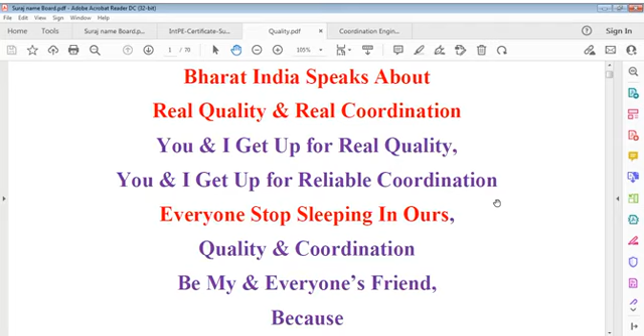And if you can lead yourself successfully, you have complete potential, you have required potential to lead others. Everybody is a leader, one has to understand that, but it depends on your control on yourself. Quality is a kind of control on organization of quality, control on quality processing, control of how much you can achieve, or control it to requirement, and also you can control it to its improvement, meaning you can add value onto requirement. That value can be in monetary form, that value can be in processing form, that value can be in degree of enrichment form, and whatever you can call that, that is quality.

Quality has many meanings. It's not only quality testing, it's life of product, life cost of product, and how long that product can be used - it is in your hands. If you produce quality and good material is used, and whatever was expected helps that person who uses your product, he should feel satisfied. That person can feel satisfied only if your product fulfills defined requirements, and that definition lies with you.

Every product is defined, every product is specified, and we have to be very clear on that. My product is defined, I understand very well what I have to do, and I'm doing this - that point is really important. We have to be clear about that requirement, what that requirement is - I have to do this.

Unnecessary explanation has no meaning, but people are not able to do something - I have seen well what level of quality these days is. There's no way people cannot come out of sleep easily, but we have to bring them from sleeping status to waking status to thinking status, and that can be brought together by certain positions, certain domains, something not mandated by education - that is quality and coordination, which both are important.

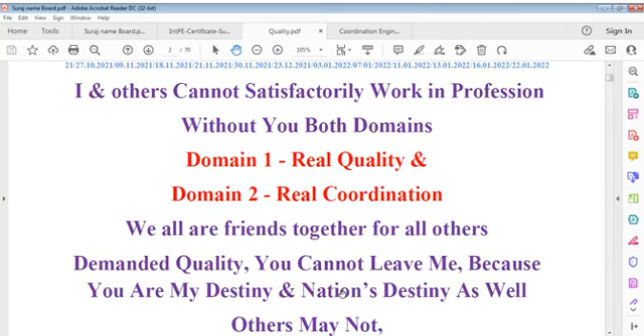How does it move itself? And when it moves with others, how does it move? How do others move? How do these interact together? That is a very important point.

That's why we said demanded quality must be there, demanded quality must be realized, and I can say I can't work without that. I also expect quality should not leave me, because it is my conscious, it is my objective, it is my destiny. And when it is my destiny, for sure, it is my nation's destiny. And if it is nation's destiny, this means it is world destiny, or ultimately, this is destiny of our part of the world.

Engineering means you have to do it. Engineering and quality are no different - without quality, engineering cannot be called done. Engineering means you have to produce quality, or if your product or work is without quality, or gives different quality than it should, then we can say you have violated the quality system. You are not given what is required - we can't accept your product, and whoever is competent to accept that product may or may not accept it.

It depends. But don't forget, engineers are taught - maybe not in subject form but in work form, post degree or post diploma. You have to work, and if you don't understand the meaning of quality in education, you may not be able to apply that by just understanding. I did not study this, I don't understand meaning of quality - but we cannot say in this age quality is not understood.

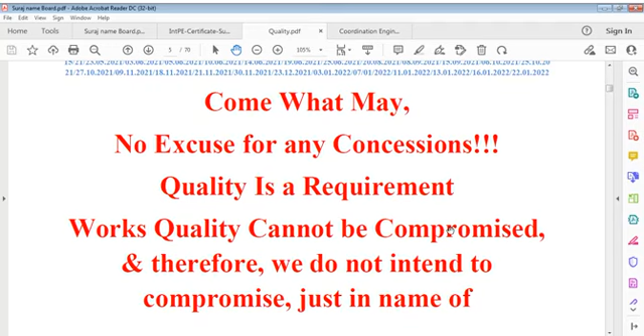Quality is a requirement, work's quality cannot be compromised. There is no question of why I should compromise. I don't compromise anything.

Therefore we do not intend to compromise just in the name of a fragile existing quality system. I don't believe in a system that is fragile, which doesn't guarantee any quality. What ISO says is different, but I believe in a system where the product comes with quality.

Otherwise there exists no meaning in doing a system, following a system, making a system, planning a system. There doesn't exist any meaning if we can't achieve it. If we can't achieve it, then what is the system built for, what is it implemented for? Now there's no meaning at all.

All systems are useless if this can't be achieved, and we can't live on a piece of paper regarding your certificate, saying I'm ISO 9001 compliant or I have the certificate. That certificate has no meaning if your work doesn't evidence it, if it doesn't prove that you have that capacity, and that capacity building is very important.

Engineering, education, and practical work, and then the job, all deliver chances of learning and learning and learning, and that's why we call it a part of development.

All work we do and all jobs we do, whatever jobs we do with responsibility, that can be called a contribution to the world of engineering, or doing something in engineering. It should improve your knowledge, and it should improve the knowledge of others, and whatever work we do, whatever item we carry out, it should be functional.

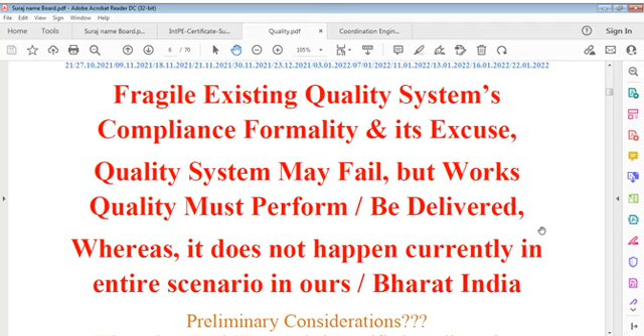This delivery is my job, this is the delivery job of an engineer, this is the delivery job of a unit, manufacturing unit, customer, whatever it is, we have to see that. So we have to find everywhere, we have to see which way obstacles come in. That's our job to know.

Obstacles - is this clear? We can understand what obstacles are available so that we cannot do a quality job. If you understand this, every job becomes very clear.

Engineering is that you have to study yourself, read yourself, you have to understand what it is. Everybody cannot be taught to you. As an engineer, you have to learn yourself, because you're an engineer, you have complete capacity for learning mathematical work, physical work, or augmentative work, quality enrichment work, whatever you do according to your caliber.

All stages come up, and you must fit somewhere, or if you fit everywhere, you're the best person, I can say. It depends on what work you have to do, and that's a very important point.

I should also say, there's nothing we can't do. If we have to do it, we do it.

That's why red lines, whatever come, there should be no red lines at all, because we are all good people. Why should there be red lines? No question of red lines, but still there are red lines because we are careless.

I can't blame that red lines come. No, red lines come, of course. Red lines mean they're not automatic. It's because of our negligence.

If we do what we say, if we comply with what we say, if we move on the same track which we decide ourselves, then why would we say we could not comply with it? There should be no question at all. But we are all human beings, and sometimes not one person works, many persons work.

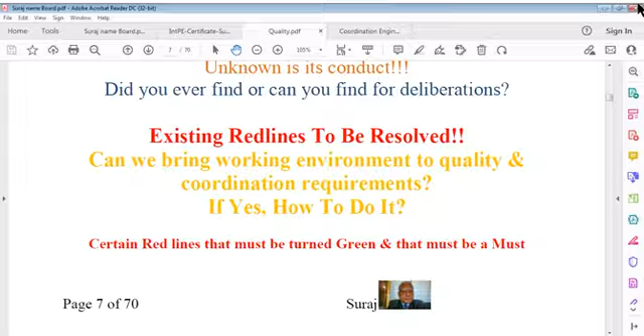And that's where red lines are there. What red lines are there? Why are these red lines there? We have to understand ourselves, nobody will teach us. If we are able to understand why these red lines are red, why can't we make it green, or make something else, so that work moves on. Red lines can be many, but once you understand what a red line is, then you can check it, and that's a very important point.

So I raised many questions last time also, that we have to do this in engineer's detailed deliberations, which I always say is very important. Detailed deliberation can never end. Every day you can think and do this, because deliberations are detailed studies. Liberation, it is deliberation. You can say we just separate D from liberation, meaning you have got complete freedom.

If you understand what to do, what way you have to do it, if your deliberation can happen, if you know, 'I trust this work, I trust this proposal, I trust this direction in relation to my capability, my caliber,' I understand this, and when I understand it means I can do it. That's called liberation, meaning you have liberated yourself from some misconception. That liberation shall happen automatically.

You are now calculative, you have calculated, you have checked. Now it can be done if I have this information, I have this system, or I have a method. I apply this, and I have done it and tested it. That comes to compliance, and that's very important.

We have to deliberate our roles, we have to deliberate our responsibilities, we have to deliberate our obligations, and we have to deliberate whether we have done it well, or whether there still lies some deficiency, some requirement that we could not comply with.

Information must be brought to those persons who require it. It must be provided at the right time for the right requirement. If you miss it, that person cannot coordinate, the person who receives that information to insert somewhere, but doesn't insert it. That means it doesn't come to study, it comes to understanding, and you say, 'okay, this is missing something.' Missing only means you did not take care of coordination and properly insert what was required.

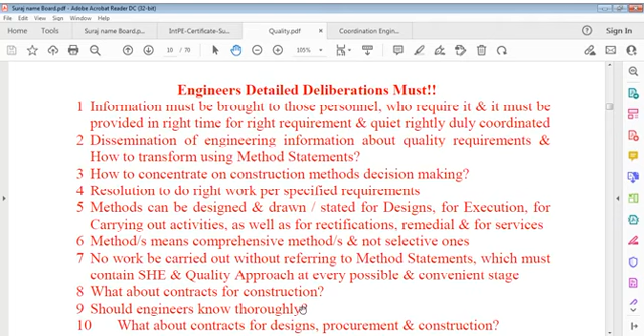It should be that when specialization moves to the highest level, everybody should know what he's done, what has been done, and how it could be better. If you can make it better with a chance, you can improve it. So that's what I say - methods means complete, comprehensive methods, and not selective ones. Every method should be honorable, and every method should be given a function of that.

So what about contracts for construction? Construction is a world where without contracts it is nearly impossible to do the job, even if it's a small job - though one should do a small job itself. But it's again the same marketing problem, procurement of workers problem likewise. So quality can be affected there. Either we don't start that project in the given time, or even during work there can be disturbances, there can be interruptions, which we can't avoid, but engineering moves on, life moves on. That's a major point - I will come back to this.

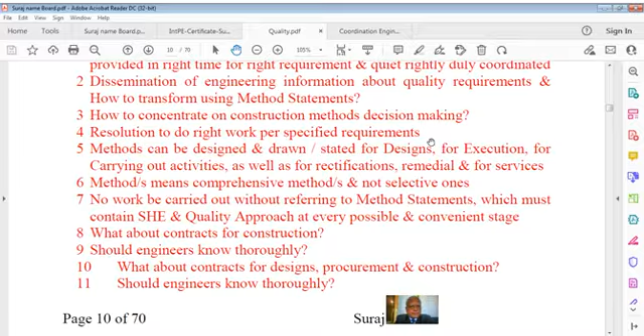Now let's go to the coordination file - reliable coordination engineering of projects, public and engineers. Coordination is a very important point here. Reliable coordination means something which can be trusted, which can be applied once and every time. Once we understand how to apply that, that's our level of requirement - that's our level of capacity building, which is very important in this case.

Capacity building means either you already have the capacity, or you have to start building it yourself. If you don't have capacity, you have to increase your own, you have to learn it, and you can learn only from existing projects or working projects, whatever you can say. If you have an opportunity to go and learn that, definitely you will like to learn that, and to see what you learned in your university - whether it is referred to that, or in line with that, or not in line with that.

The points are really wonderful, and we have to see how engineers do. Engineers know what they do, but every engineer does differently, depending on ease of working and ease of convenience. It's okay, fine, as far as quality is achieved and production is achieved. We should not mind anything about that.

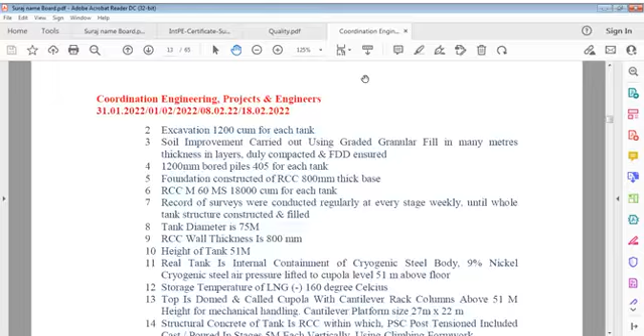So reliable coordination engineering was the way we are talking about, and it's the same way. I can see there are so many files in this also. I like to go and see if we can do something or we can't, and that's important. Before that, I'd like to tell you about my experience in my field.

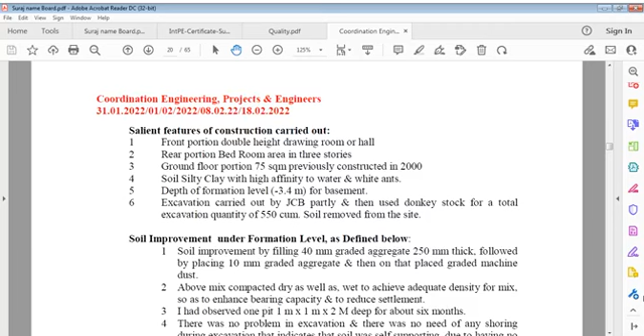Where I could reach - I'd like to discuss this with you first, because before doing something you should know what particular person is talking. I started from a very small level. In fact, if you see my CV, you will be surprised to see how I could reach that level, or what I could achieve. I don't say I achieved anything specific, but it's better sometimes that we evaluate it ourselves.

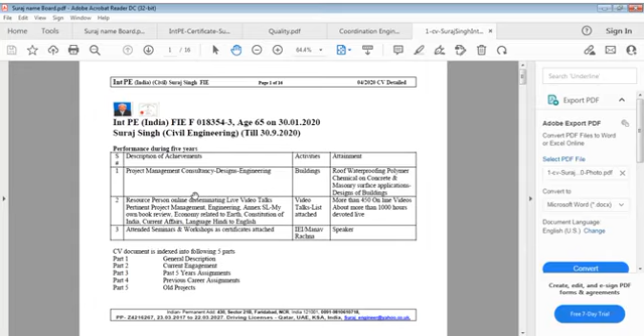I would like to open this file for you people to view what I'm saying. First, I'd like to list the many organizations I have worked in. For example, if you can see this file, this is my old CV, from many years back - I think it's 2020.

So it's 2 years back. This is exactly 4 months - so a 2 year old CV. I haven't updated it actually. It can be updated, that's not a big issue, it is not a problem.

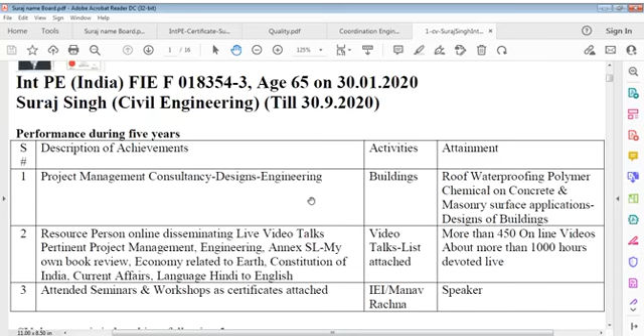You can see in this I am declaring what have been my performances - usually current performances, you can say, about what I did last time. An important part of this is resource person, online disseminating live videos, talks pertinent to project management or engineering Annex SL, whatever it is. That is for sure my own book review, you can say, and of course economy related to Earth, Constitution of India, Bharat, current affairs, language Hindi to English.

These are some videos, some references. This is continuous, as possible we try to continue, because it's for dissemination to people - which is an opportunity, a privilege we did not have enough time for. I want to give privilege to those people who are positively involved in doing quality job, not everyone.

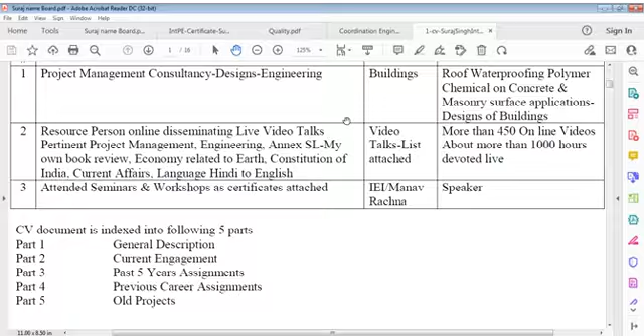The CV has been divided into many parts. There is a general description part, current engagement, past 5 years, previous career assignments, and old projects. So here interest lies with old projects, and that's why I say old projects. What are these? Maybe this is a bigger file, I can say okay, that's fine, and we have to see.

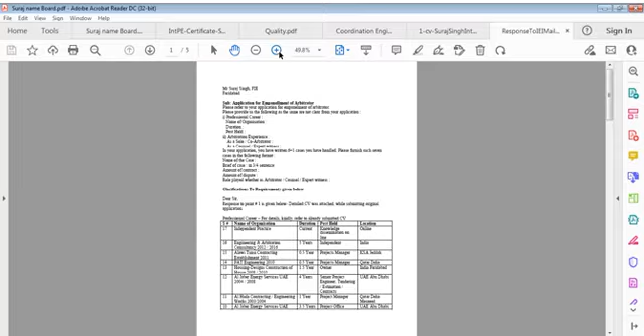Okay, this is that, and of course I will open this. This is the file which I sent to them. Now it's this one, you can say. In this I have written a response - this response was my 17 assignments.

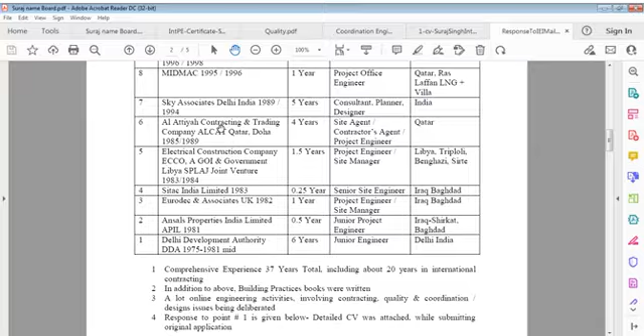You can see the organizations - it started from the first one, Delhi Development Authority, where I worked for 6 years between 1975 and 1981 as junior engineer. This was the lowest category in the engineering profession, and I still respect it because it was the beginning of my career. I worked there for 6 years, but learning was very limited. I can't comment much on that, because it was the initial start of my work and I was not well educated at that time - I only had a diploma in engineering, but I could successfully complete my degree there itself.

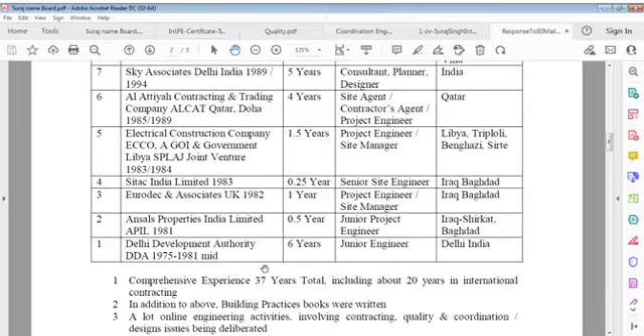And in 1981, in April, I worked for Ansals Properties India Limited. Let me just close this file, as it may be necessary later. This Ansals Properties - I worked there for 6 months on the Iraq project, grain silos, or another one also. There I was junior project engineer, located in Iraq, Shirkat, Baghdad, and this was good work for me to learn. Because I came from the government sector, I didn't actually know what a contractor has to do, particularly in the Gulf or Middle East.

Quality system is very strict. I will talk about that system later. Let me first share with you my information about my assignments, and then this is the second one.

Then I went to Eurodec and Associates, a UK organization owned by an Indian person. I worked there for more than a year as project engineer, site manager for one tower portion of a building. That was in 1982.

After that there were some problems, so I joined another company. I left because that company was in problem, some technical or political problem. Then I tried to get back to Iraq because my career started there.

This was my fourth assignment with Sitac India Limited, as senior site engineer. I worked there in Baghdad, and then moved to Electrical Construction Company, ECCO as we used to call it.

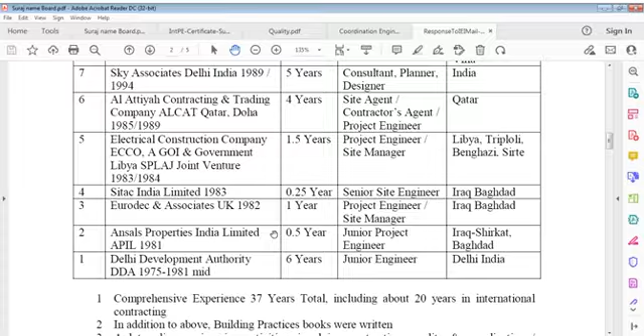Then I came - there was some reason I had to stay in Delhi for a couple of years, and I did consultancy work there for buildings and tried town planning too, but it didn't successfully work out. So I went back to Qatar again, to MIDMAC Contracting.

I worked there for them on 2 projects. One was an LNG project, record surveying of that, and the other was construction of a beach villa, like a big palace, just on shore.

I worked successfully as office engineer, site engineer, or as director of some project - though director you may not say, project manager or agent you may say. Director doesn't mean much because I was a very small person.

After that, we joined Khalsa Contracting and Trading in 1996-98. I had to work in that company as chief engineer for many buildings, commercial buildings and schools.

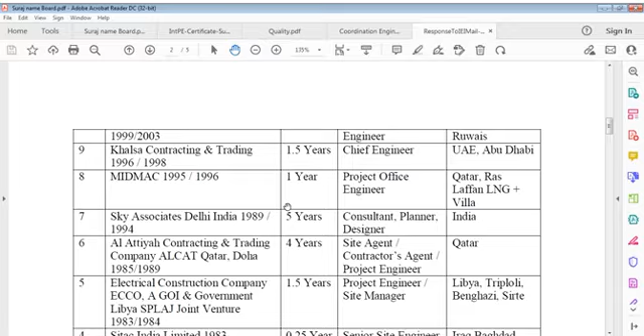After MIDMAC, I joined Khalsa Contracting and Trading as I said, and then from 1999 to 2003 I joined Al Jaber Energy Services, United Arab Emirates. I was located for about 3.5 years at Ruwais, on the 600 kT ethylene plant project.

Of course I had to stay in the desert in those days. There was no way to stay in the city because it was 300 kilometers away, requiring daily driving, and I didn't have a car there or anything.

So that's how it was. At Al Jaber Energy Services I did good work on site. I learned to try complete coordination, and I tried to make proposals for everything. Those proposals addressed missing items in the designs, but you can do it yourself if you have the opportunity.

That made me learn better. I felt the learning was required. I didn't have every piece of information, but learning can never end. Even documentary learning of one year is important because it gives you input. It's not simply that you attend university for a couple of years and get a degree. The question is not for a degree, the question is knowledge. What knowledge you draw, and how that knowledge is tested. Then we have to check ourselves on everything.

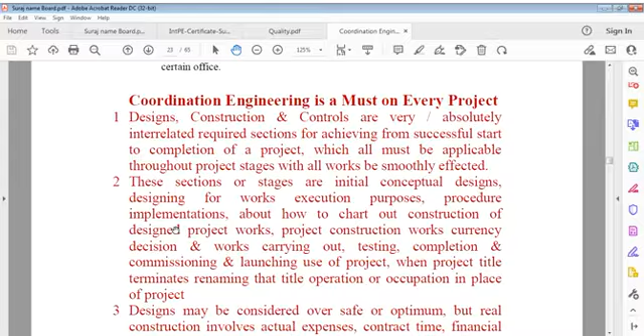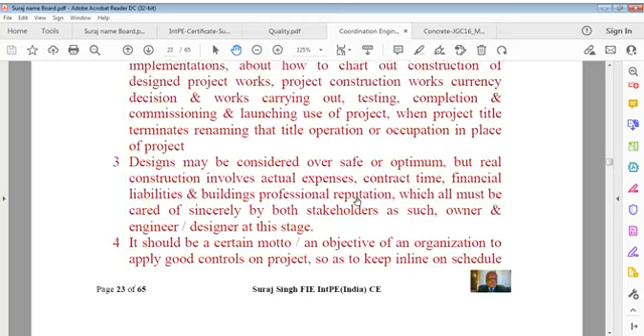If you see the concrete section, as we have Japanese specifications, coordination is a very important part. Again and again I'm stressing this. We should be sure about it. Coordination cannot be ignored. Whatever comes, if coordination and information are not available, it becomes more the responsibility of everybody. We should know what coordination is and how it can affect our life. If we don't know this, then we can't do it.

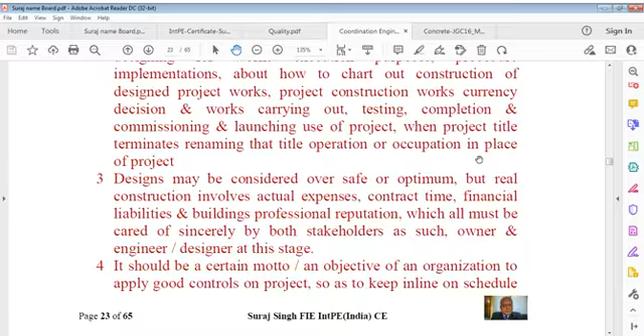Simple as that. Whatever somebody writes, if designs are to be implemented, you should have controls on the works. That's an important point. If you don't have controls, you can't control anyone. That's what I mean when I say we have to be very serious in our capacity building. Capacity building remains just capacity until we work on it and think on it. Whatever knowledge areas we have, what controls we have, we have to see progress, cost, cost escalation, project time, budget requirements and allocations, and quality requirements and assurances.

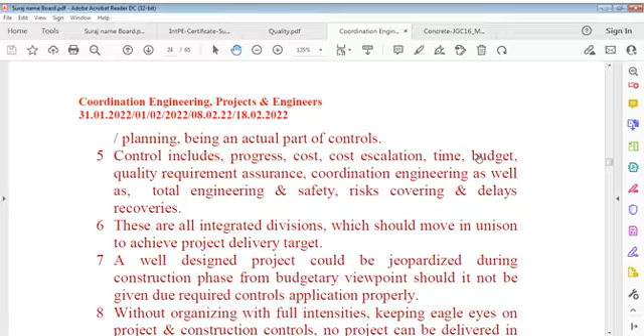Coordination engineering is an important part of this, and quality is also very important. You can say everything is a part of it, we can't live or go without it. That's very different. So my dear friends, I'll jump over to concrete quality now, which was I think somewhere around page 180. I still remember 180 or nearby. Let's see what it is.

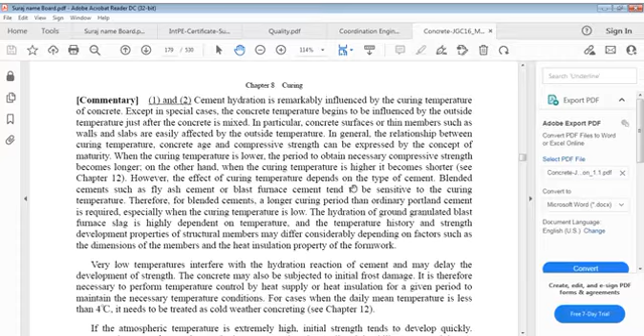So maybe it's somewhere here. This was temperature control, I think we've already done temperature control, so we won't waste time on this. We'll go to protection against harmful effects. What are the harmful effects we should think of now?

Protection against harmful effects. Now we are talking of concrete, and we are leading a way in which we can be better, much better than we are here. It's not simply what we are saying, it's a logical study. Protection against harmful effects: concrete shall be protected against harmful effects such as vibration, impact, and other loads.

Before that there was a paragraph which we didn't go into detail on, about accelerated curing, which includes atmospheric pressure steam curing, the natural one, and autoclave curing, which is at a higher temperature. There's autoclave curing and heat curing. For further information we can refer elsewhere.

That's no problem. In special concrete specifications, heat curing is carried out using heater mats or jet heaters. Concrete surface is subject to drying and cracking, so in such cases humidifying devices may be used in accelerated curing. Care must be taken because cracking may result if temperature is not lowered gradually after completion of curing.

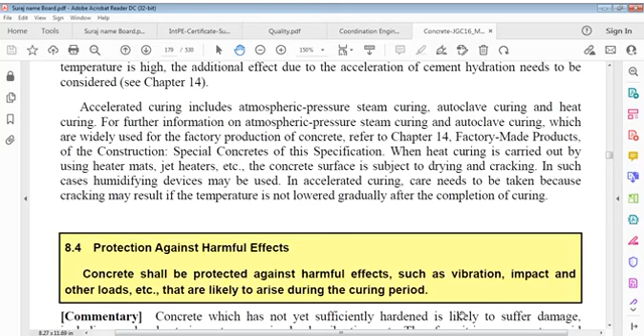So what it says is: in accelerated curing, care is required because cracking may result if temperature is not lowered gradually after completion of curing. Also, if member size is large - whether beam, column or slab - and a considerable temperature increase due to hydration is anticipated, or if a large temperature differential is anticipated, cracks may develop due to thermal stress.

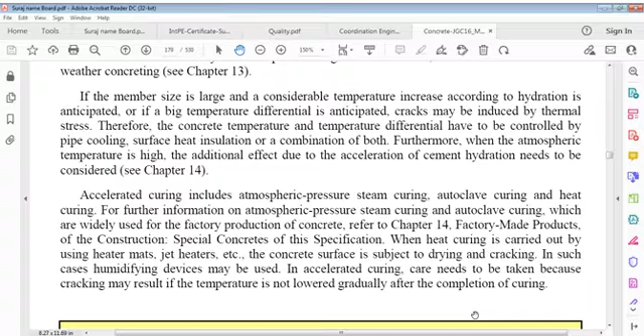Concrete temperature and temperature differential therefore have to be controlled by pipe cooling, or by surface heat insulation, or a combination of both. When atmospheric temperature is high, the additional effect due to acceleration of cement hydration needs to be considered.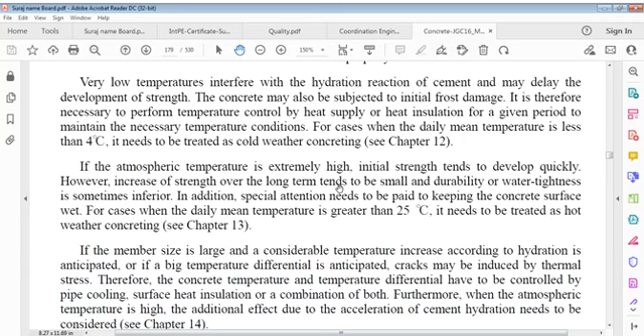Also, we have to consider: if atmospheric pressure or atmospheric temperature is extremely high, initial strength tends to develop quickly. However, increase of strength over the long term tends to be small, and durability and water tightness of concrete is sometimes inferior. In addition, specific attention needs to be paid to keep concrete surface wet, for cases when daily mean temperature is greater than 25 degrees Celsius. That's a very important point to keep in mind.

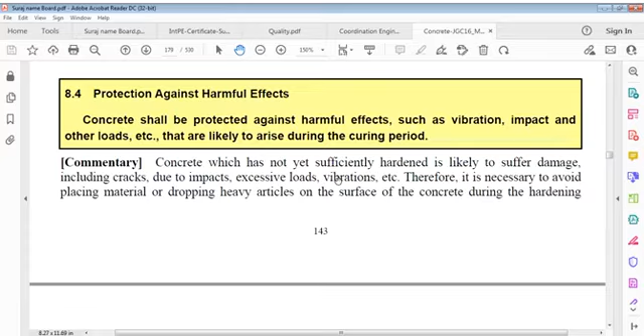Now let's go to protection against harmful effects.

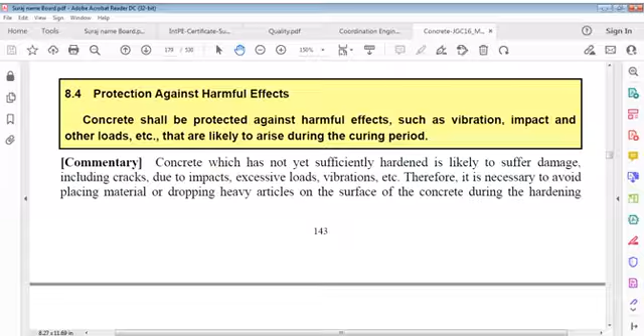Concrete shall be protected against harmful effects such as vibration, impact, and other loads that are likely to arise during the curing period. In the commentary it says concrete which has not yet sufficiently hardened, which is still soft or green, is likely to suffer damage, including cracks, due to impacts, excessive loads, vibration, etc. Therefore, it's necessary to avoid placing materials or dropping heavy articles on the surface of concrete during the hardening period.

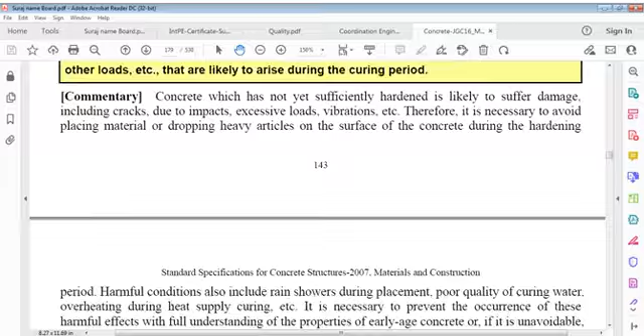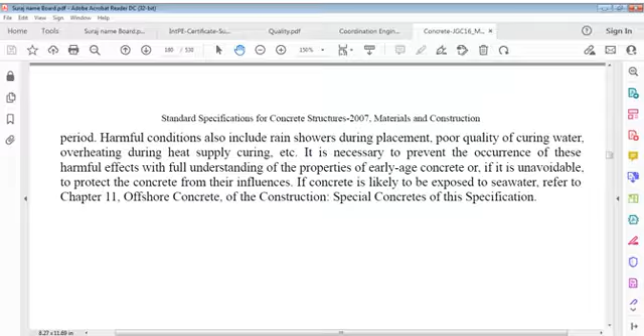Harmful conditions also include rain showers during placement, poor quality of curing water, overheating during heat supply curing, etc. It is necessary to prevent occurrence of these harmful effects with full understanding of the properties of early age concrete, or if unavoidable, to protect concrete from their influences. If concrete is likely to be exposed to seawater, we have to refer to the section on special concretes of this specification.

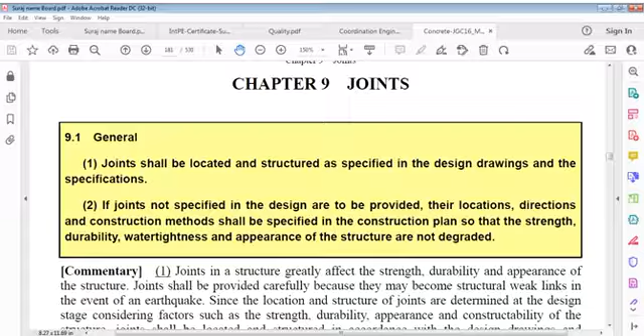Now we have to see joints. We have discussed some joints already. Construction joint of inversely placed concrete we did, and then vertical construction joints we are doing here. We have covered mesh wire netting, and we did up to here reinforcement for construction joints.

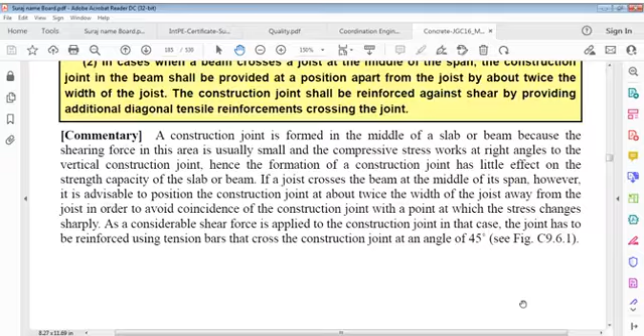We'll just have a little look at this as well, construction joints of floor systems. We had done construction joints in columns and walls, but I'll read it again for reference. Construction joints in a column or wall integrated with the floor system should be formed adjacent to the border between them. Concrete in haunches shall be placed at the same time as floor concrete. Similar procedures shall be used in structures with an overhang.

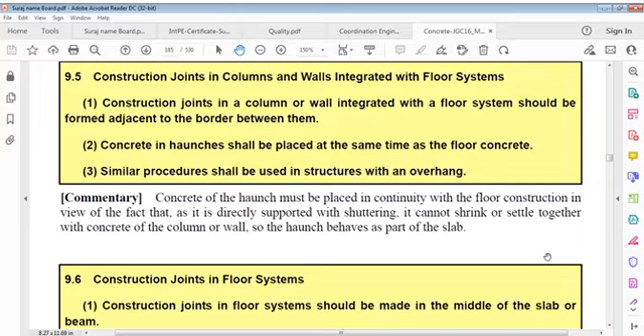So, construction joints in columns and walls integrated with floor systems: such joints should be formed adjacent to the border between them. Concrete in haunches shall be placed at the same time as floor concrete, and similar procedures shall be used in structures with an overhang. Concrete of the haunch must be placed in continuity with floor construction, in view of the fact that as it is directly supported by shuttering, it cannot shrink or settle together with concrete of the column or wall. So the haunch behaves as part of the slab.

Construction joints in a floor system should be made in the middle of a slab or beam. In cases when a beam crosses a joist at the middle of its span, the construction joint in the beam shall be provided at a position apart from the joist by about twice the width of the joist. The construction joint shall be reinforced against shear by providing additional diagonal tensile reinforcement crossing the joint.

A construction joint is formed in the middle of a slab or beam because shear force in this area is usually small, and compressive stress works at right angles to the vertical construction joint. Hence, formation of a construction joint has little effect on the strength capacity of the slab or beam.

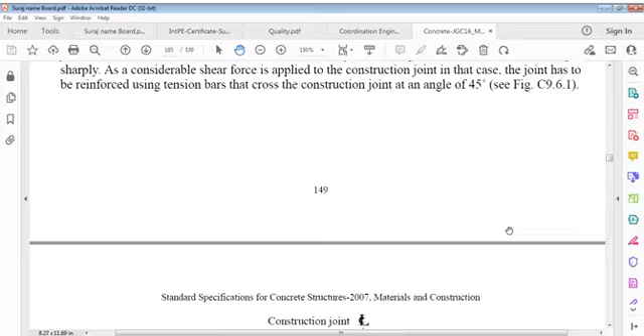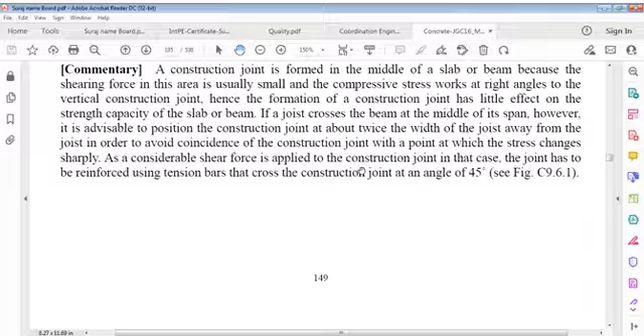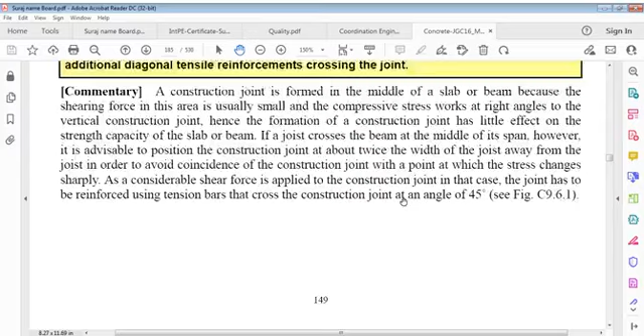Here you can provide this steel at 45 degrees, or diagonal reinforcement. It says that joist or twice width of joist construction joint shall be reinforced against shear by providing additional diagonal tensile reinforcement crossing the joint. With tensile reinforcement, you can reduce spacing of stirrups, so that can also replace this.

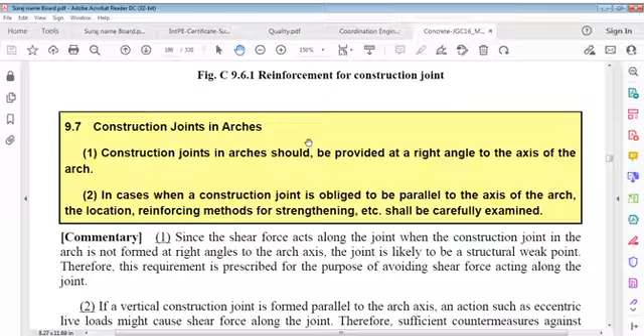Now, construction joints in arches should be provided at a right angle to the axis of the arch, and that's an important one. To be very clear about that also.

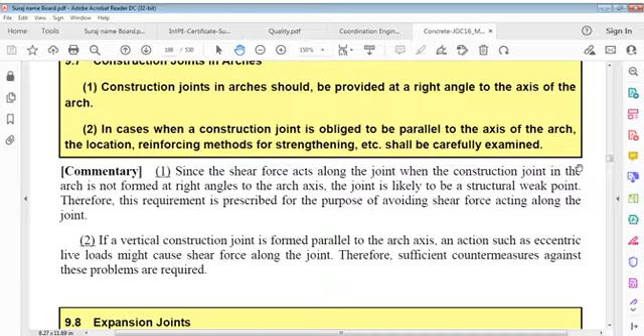That is, since the shear force acts along the joint, when a construction joint in an arch is not formed at right angles to the arch axis, the joint is likely to be a structurally weak point. This requirement is prescribed for the purpose of avoiding shear force.

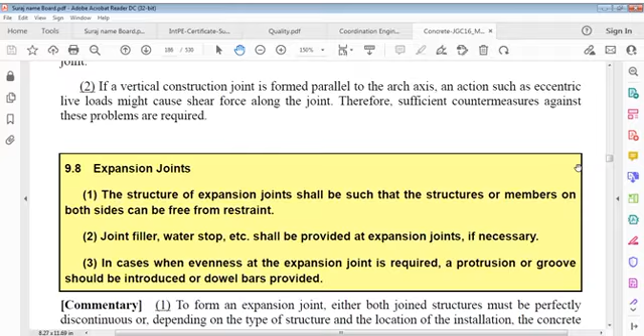Now, if a vertical construction joint is formed parallel to the arch axis, an action such as eccentric live load might cause shear force along the joint. Therefore, sufficient countermeasures against these problems are required.

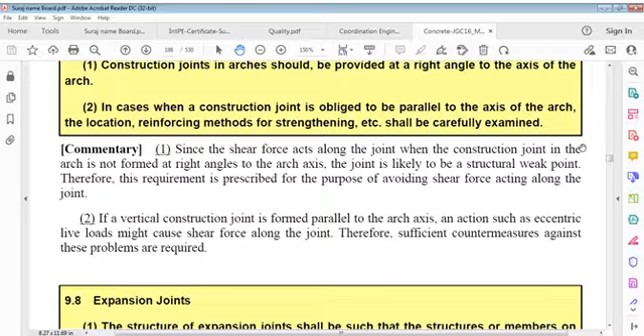It says expansion joint now. Expansion joints we are going to reach. Expansion joints.

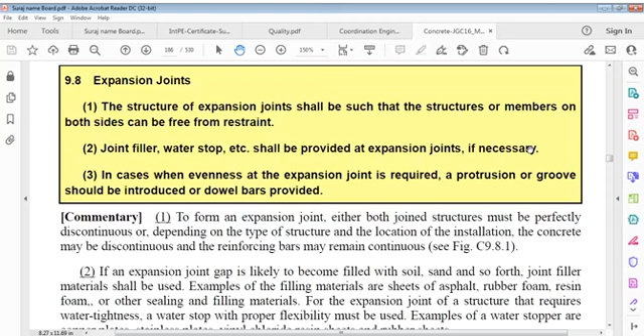The structure of expansion joints shall be such that structures or members on both sides can be free from restraint. Joint filler, water stop, etc. shall be provided at expansion joints if necessary. In cases when evenness of expansion joint is required, protrusion or groove should be introduced or dowel bars provided.

To form an expansion joint, either both joined structures must be perfectly discontinuous, or depending on type of joint, type of structure and location of installation, concrete may be discontinuous and reinforcing bars may remain continuous. If an expansion joint gap is likely to become filled with soil, sand or so forth, joint filler material shall be used. Examples of filling materials are sheets of asphalt, rubber foam, resin foam or other sealing and filling materials.

For an expansion joint of a structure that requires water tightness, a water stop with proper flexibility must be used. Examples of water stoppers are copper plates.

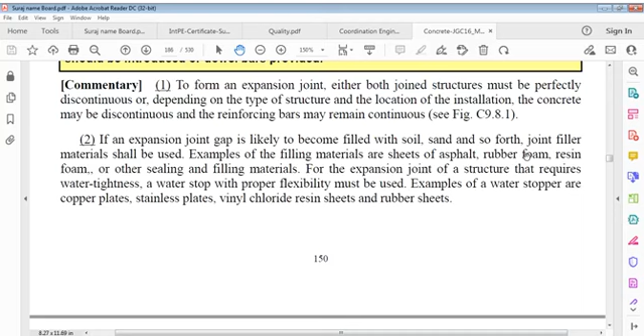Here are sketches of this, very easy, you can see.

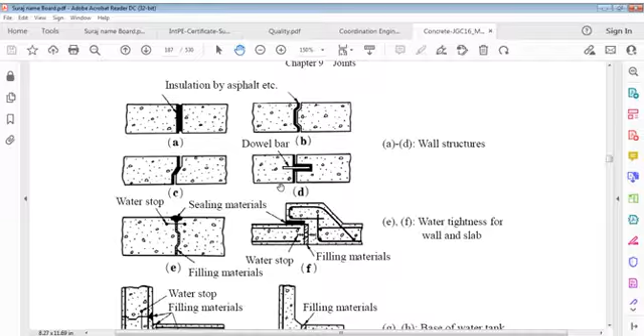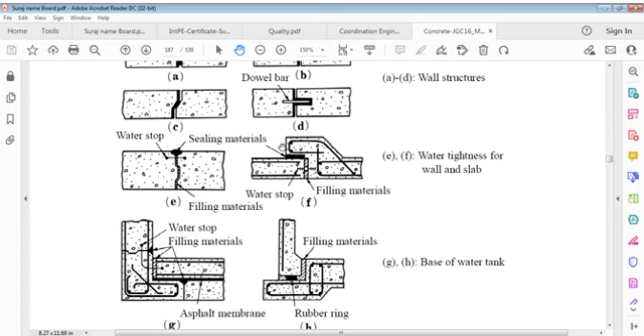And then it's water stop here in addition to that, same one. Then we can say the same shape here, and this is a dowel bar and mastic here, sealing material, and this is over two levels. This is the sealing material and other bars, and this is your water stop. Then the filling material can be whatever is described there as water stop and filling material.

Now water stop filling material, you can see on the roofs it happens. Asphalt membranes are slab, so there's water stop filling material, and here is what we say this filling material. This is slab, the waterproofing layer, asphalt membrane, and that's what we say. So about asphalt membrane, about filling material, and there is one rubber ring.

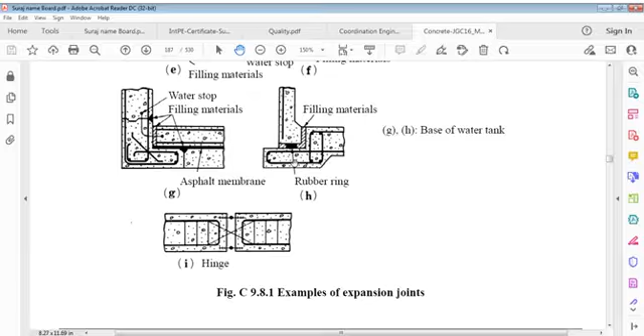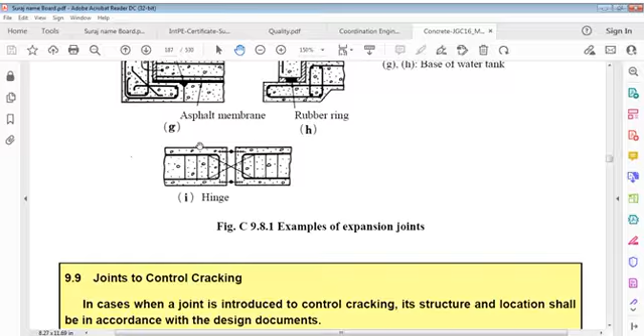In that case, we can say hinge here. This hinge provision, likewise in water, is very, very little different here. It is because hinge is this, and this is water tank.

It should be in the design document.

In case of concrete structures, there are many factors that cause deformation besides applied forces, including temperature change due to heat of hydration and outer temperature, drying shrinkage, and so on. Cracks may develop. If such deformation is restrained, it is therefore desirable to control cracks by forming notches in cross section at given intervals in order to concentrate cracks.

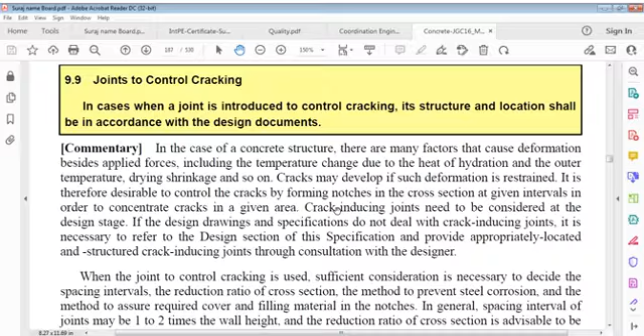Crack inducing joints need to be considered at the design stage. If design drawings and specifications do not deal with crack inducing joints, it is necessary to refer to the design section of specifications and provide appropriately located and structured crack inducing joints through consultation with the designer.

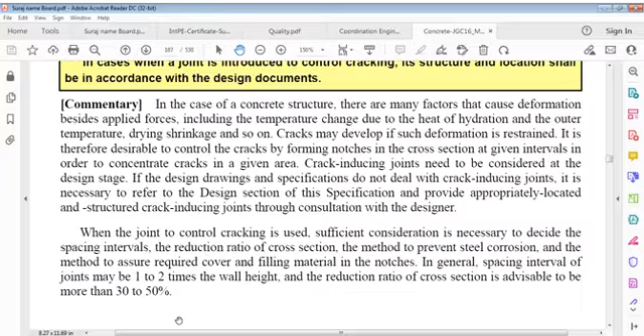In case of concrete structures, there are many factors that cause deformation. Now, when a joint to control cracking is used, sufficient consideration is necessary to decide spacing material, spacing intervals, reduction size of cross section, method to prevent steel corrosion, that is reduction ratio of cross section, method to prevent steel corrosion, and method to ensure required cover and filling material in notches.

In general, spacing interval of joints may be 1 to 2 times the wall height, and reduction ratio of cross section is advisable to be more than 30 to 35%, 30 to 50%.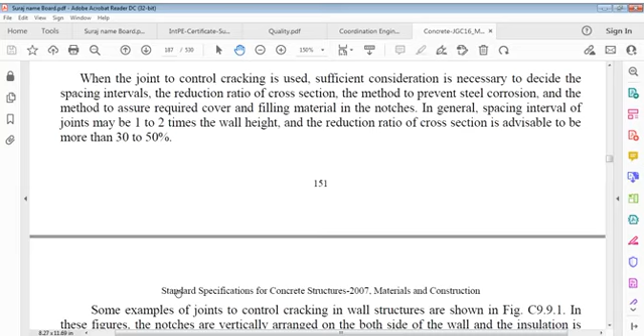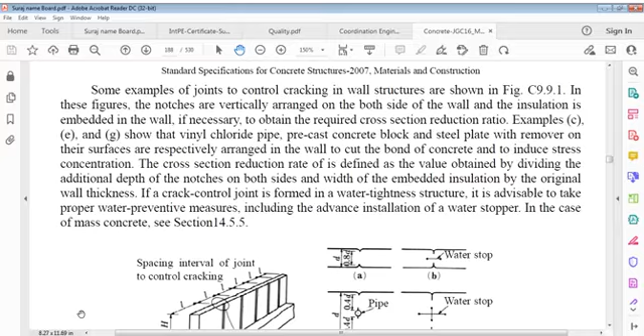Some examples of joints to control cracking in wall structures are shown. We'll discuss these figures. Notches are vertically arranged on both sides of wall and insulation is embedded in wall, if it is necessary to obtain the required cross-section reduction ratio. We have here C, E and G - we'll see what that is. Vinyl chloride pipe, precast concrete block, and steel plate with remover on their surfaces are respectively arranged in the wall to cut bond of concrete and to induce stress concentration.

Cross section required reduction rate is defined as the value obtained by dividing the additional depth of notches on both sides and width of embedded insulation by original wall thickness.

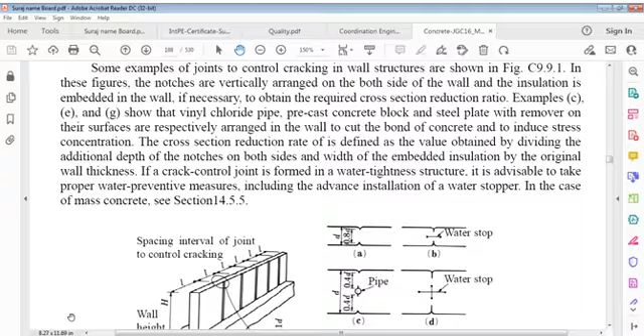If a crack control joint is formed in a water tightness structure, it is advisable to take proper water preventive measures, including advanced installation of a water stopper.

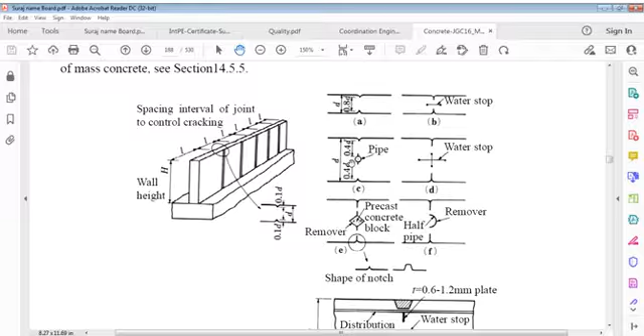Now this is spacing intervals of joints to control cracking, and wall height is there, and that's what this section shows. This is what depth is between two notches, 0.8 D, and there's a water stop here, and of course we can put a pipe in place of here, for purpose of drainage, and also a water stop here.

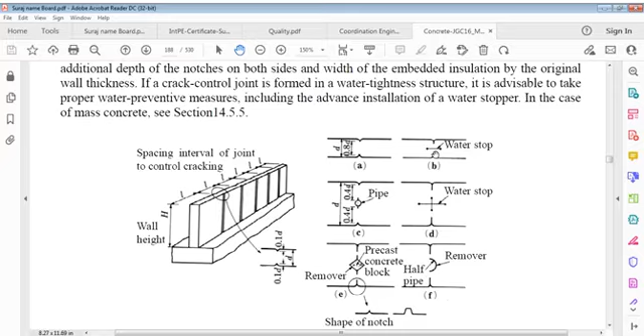We have a precast concrete block here in this place with notches. This is a remover, and we can say the remover is here, and the pipe.

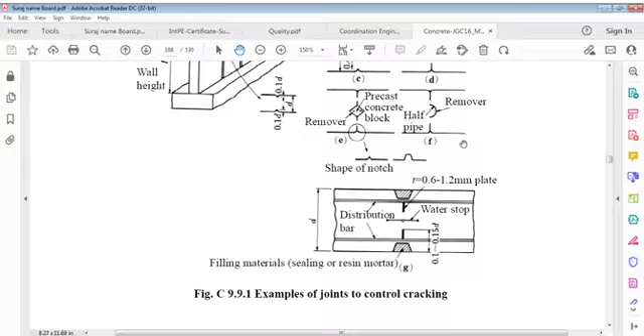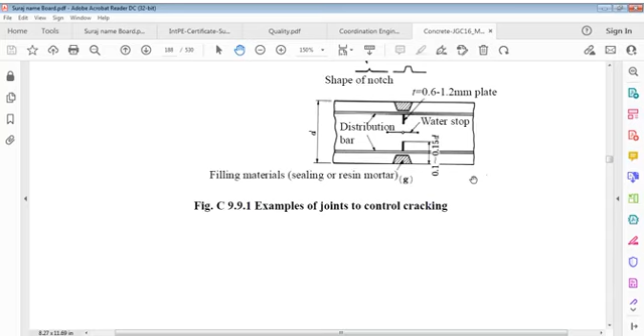Examples of joints to control cracking: there are notches here, sealing or resin mortar, filling material, and here is water stop. This is plate here, and this is plate here. Filling material, and that is what this is - shape of notch. This is distribution bars. Examples of joints to control cracking.

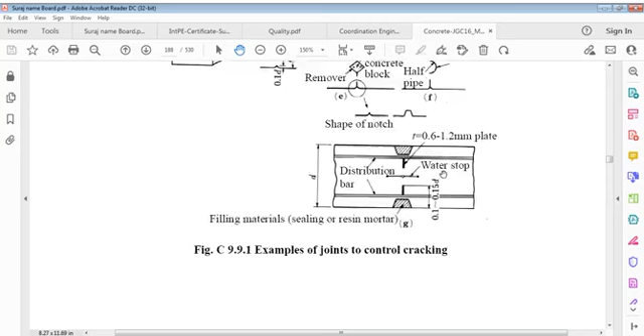Now we come to Chapter 10 reinforcement, which is very important here. Reinforcing bars shall be fabricated to shape and size specified in design documents, using appropriate methods that do not cause any damage to the quality of bars.

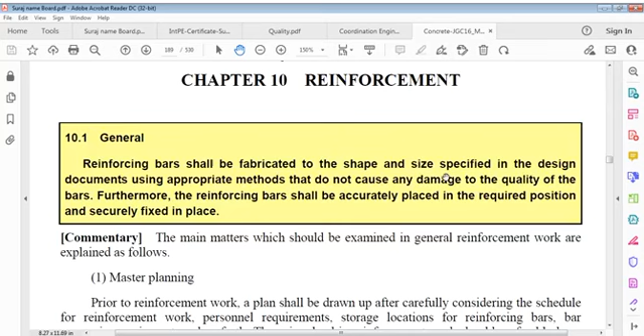Furthermore, reinforcing bars shall be accurately placed in whatever is required. Reinforcing bars shall be fabricated to shape and size specified in design documents using appropriate methods that do not cause any damage to the quality of bars. Furthermore, reinforcing bars shall be accurately placed in required position and securely fixed in place.

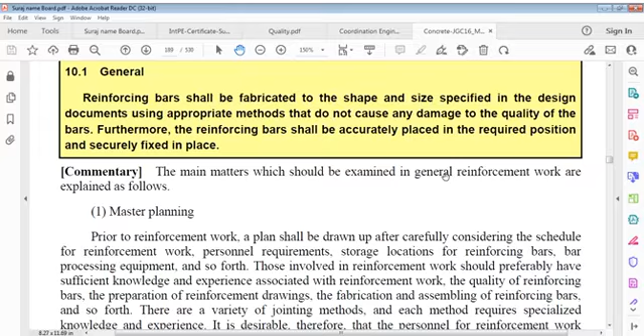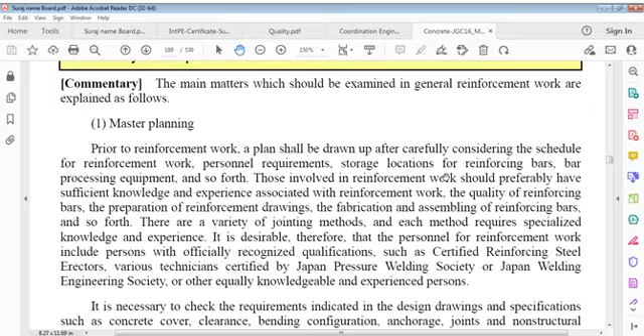Main matters which should be examined in general specifications of reinforcement work are explained as follows. Master planning - what is master planning here?

Prior to reinforcement work, a plan shall be drawn up, considering how to do it. A plan shall be drawn after carefully considering schedule for reinforcement work, personnel requirements - that is BBS - and storage locations for reinforcing bars, bar processing equipment, and so forth. Those involved in reinforcement work should preferably have sufficient knowledge.